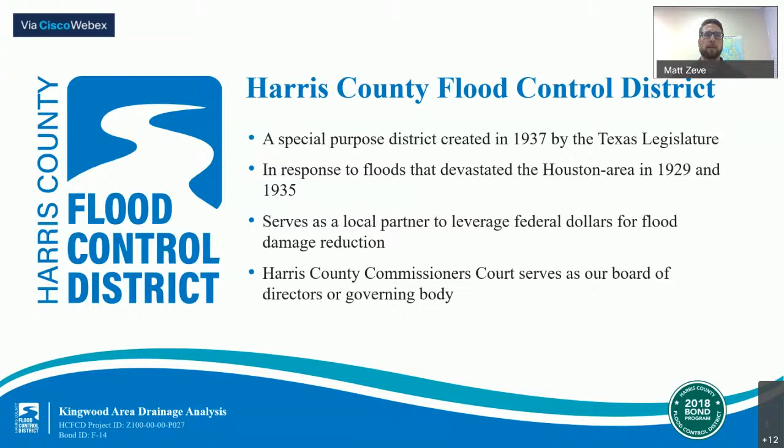The mission of the Harris County Flood Control District is to provide flood damage reduction projects that work with appropriate regard for community and natural values. One of the most difficult challenges we face is constructing effective projects that are sensitive to community and natural values in a highly urbanized area.

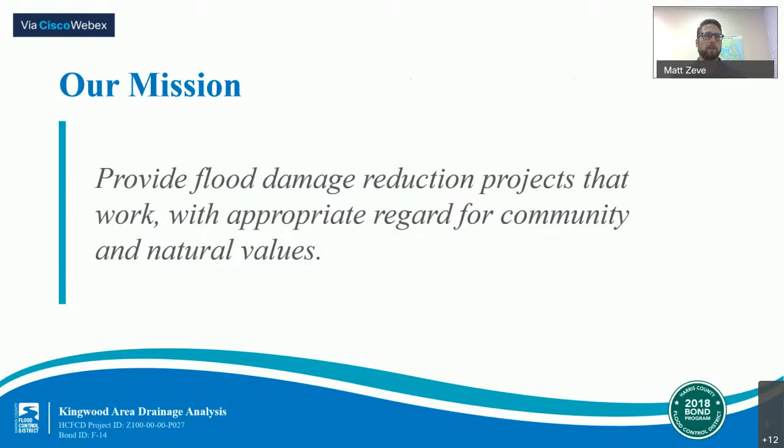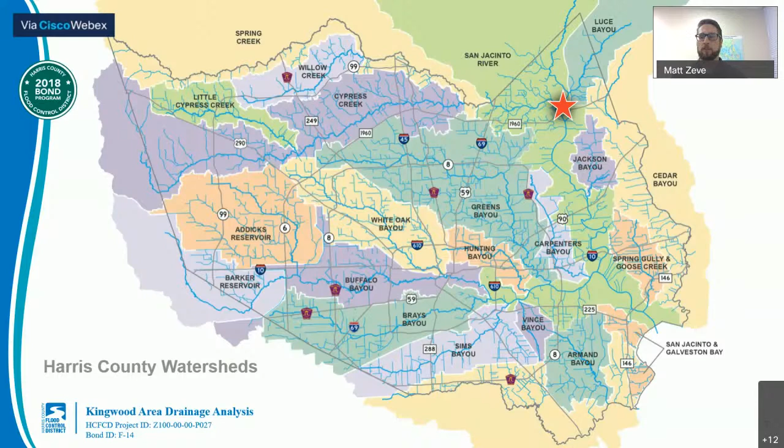Harris County includes 22 main watersheds, totaling approximately 1,800 square miles and more than 2,500 linear miles of channels. 2,500 linear miles is approximately the distance from New York to California. Each watershed has its own unique characteristics and needs. Tonight, we're discussing the Kingwood Area Drainage Analysis within the San Jacinto River watershed. The majority of the San Jacinto River watershed is actually located outside of Harris County.

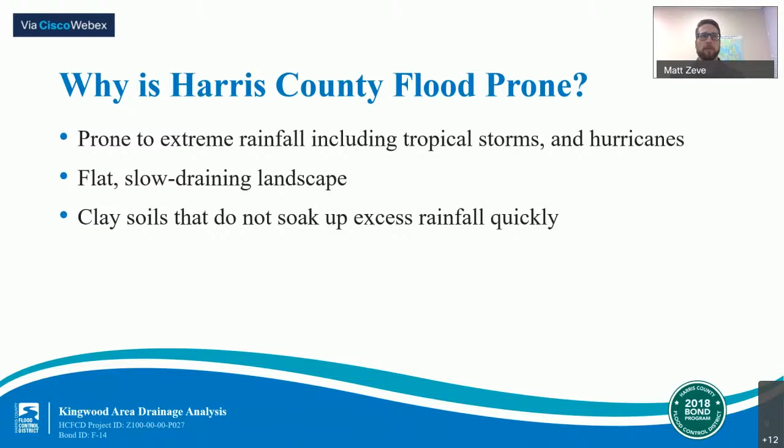Our region has always faced the threat of flooding. Our low-lying, relatively flat land and predominantly clay soils create a naturally flood-prone environment. These flooding issues become more apparent when combined with dense population centers and development that has occurred in our region.

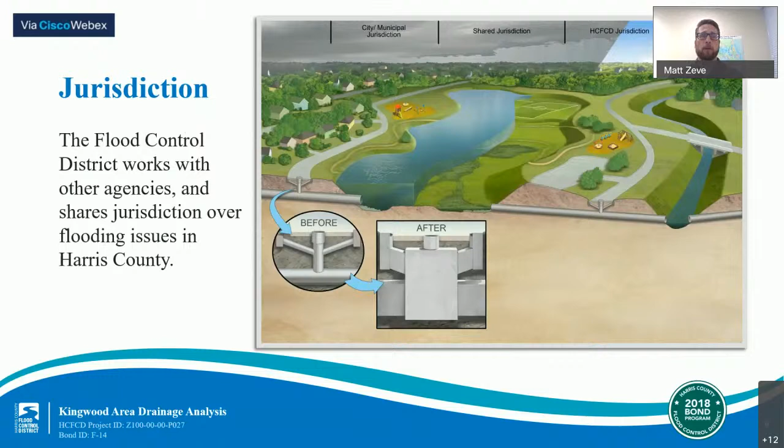Since it is our policy to avoid impacts to properties downstream, stormwater detention basins help to safely take in and temporarily store excess stormwater during heavy rainfall events. Often we partner with the Harris County precincts, utility districts, and others to add recreational amenities such as trails to these basins and along our channels.

Every flood damage reduction project is unique, yet each project begins and ends with common and predictable milestones along the way. Whether a project moves forward and how quickly depends on many factors, including the availability of funding at each milestone, shifting community priorities for flood damage reduction, and other changing circumstances from year to year.

Once a feasibility study report has been approved, and if funding is available, the project or projects move into the project development or preliminary engineering stage. During this stage, the Flood Control District engineers and environmental specialists develop and evaluate possible alternatives, and prepare a project development or preliminary engineering report that includes recommendations that meet flood damage reduction goals. This report will identify needed rights-of-way, determine utility relocations, and develop preliminary cost estimates for recommended projects.

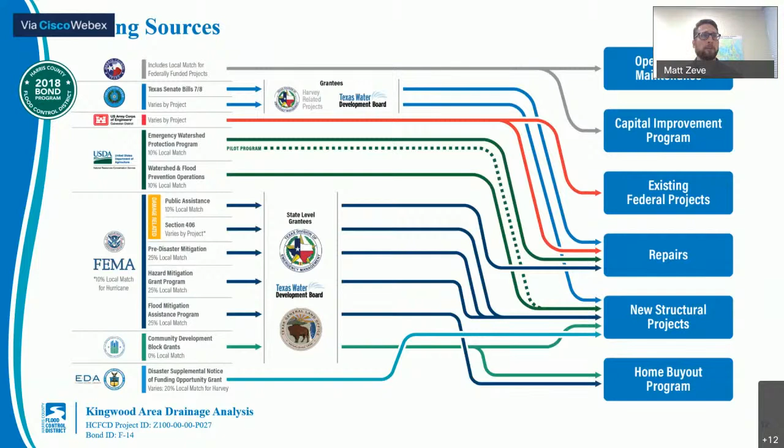Before we proceed with the presentation, we'd like to address some of the frequently asked questions we've received, since we're here tonight to focus just on the Kingwood Area Drainage Analysis. As general information, the Flood Control District does not typically perform dredging, but we have performed conveyance restoration or desilt projects throughout the county as needed.

House Bill 1824, approved by the 86th Texas Legislature, also allows the San Jacinto River Authority, or SJRA, and the Flood Control District to remove material from the San Jacinto River and its tributaries to restore, maintain, or expand storm flow capacity. The SJRA is leading efforts, with support from the Flood Control District, to investigate the feasibility of one or more sand traps along the west and/or east forks of the San Jacinto River to reduce future sedimentation.

The Lake Houston Dam Spillway Project is being led by the City of Houston and is intended to increase the outflow capacity of the Lake Houston Dam. This project proposes additional capacity for the Lake Houston Spillway that would allow for a rapid decrease of water levels in Lake Houston in advance of storm events.

We've also received many concerns from the community related to repetitive flooding near the confluence of Taylor Gully and White Oak Creek. The Kingwood Study analyzed Taylor Gully from the study limits at Bassingham to the natural section of the channel at the confluence of White Oak Creek. The majority of White Oak Creek is outside of Harris County, and analysis indicates that issues with White Oak Creek are caused by water backing up from the east fork of the San Jacinto River. This would need to be analyzed further as a regional issue.

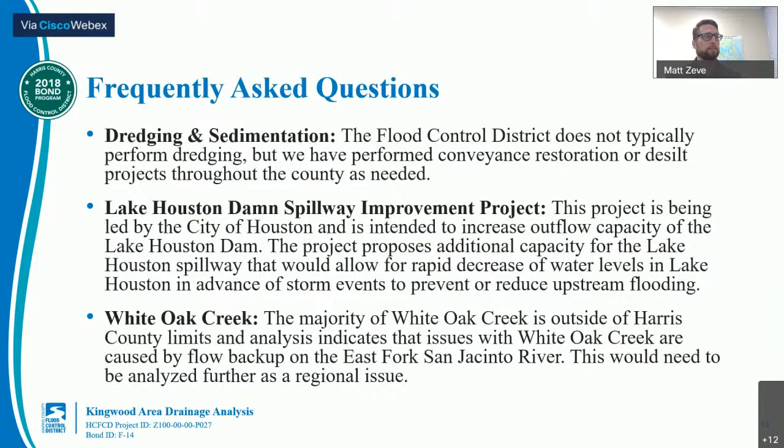Understanding jurisdiction over the different parts of the drainage network in Kingwood is important. The Kingwood Area Drainage Network includes all the paths that stormwater takes from raindrops first hitting the ground to stormwater flowing out of the Kingwood area and into channels that move water to Lake Houston. The first part of the drainage network could include roof gutters, French drains, or the grading or slope of your yard. Typically, property grading is designed to move stormwater from your yard to a storm sewer or roadside ditch. When the stormwater is on your property, that stormwater is typically the property owner's responsibility.

Most residences in the Kingwood area rely on street drainage systems. This includes roadways that have been designed to convey stormwater to roadway inlets that allow stormwater to drain from the road into storm sewer. Some areas in Kingwood have roadside ditches that drain water out of neighborhoods. Neighborhood drainage, including roads, storm sewers, and roadside ditches, are typically under the jurisdiction of the City of Houston, not the Flood Control District.

Before the Kingwood area had homes or structures, when large rainfall events occurred, stormwater would simply flow over land to receiving bayous without any obstructions. But now with homes and structures in the Kingwood area, the area's natural drainage pathways were altered. Today's development criteria mandates that extreme rainfall be moved out of a neighborhood through adequate local drainage or stored safely in a stormwater detention basin. However, these criteria were not adopted until around the year 2000.

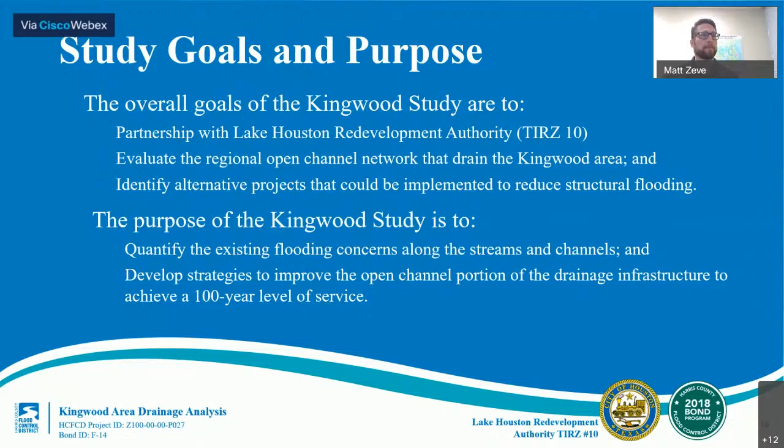The portion of Kingwood south of the West Fork of the San Jacinto River is not included as a part of this study area, but will be included in the Flood Control District's drainage analysis of the Atascocita area, which is a separate bond project. In this presentation, when I refer to flooding, I'm exclusively referring to structural flooding, or when stormwater enters homes and businesses. I'm not referring to street flooding.

The roads in the Kingwood area are part of the Kingwood Drainage Network, and many of these roads were purposely designed to move stormwater. The concept of building low roads and elevating homes is a common development strategy throughout Harris County. Today, development criteria for roads only allows for ponding of approximately 1 foot of water. A modern design will require the developer to design a path where excess rainfall runoff can drain out of a neighborhood without flooding structures. In Kingwood, there are generally no planned extreme event pathways.

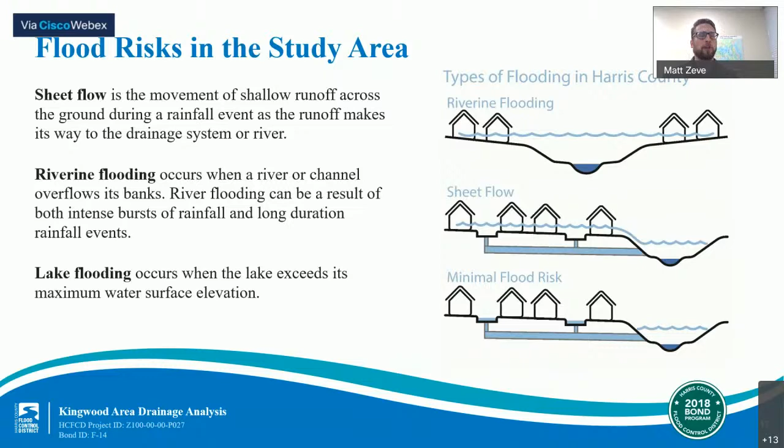So when rainwater exceeds the capacity of the storm sewer system in the streets, which is generally between 1 to 2 inches per hour, street ponding will begin like it did during Tropical Storm Imelda. If extreme event pathways were to be designed, they would need a channel or bayou with the appropriate capacity to be able to handle the additional flows. So the first step in the process to reduce flooding in the Kingwood area must begin with improving the bayou and channel network, which is the focus of the Kingwood study.

Again, this study represents the first critical step in the process to improve the drainage network in the Kingwood area. The methodology followed for the Kingwood study reflects current thinking and modern tools for hydrologic and hydraulic analysis, and incorporates the latest information with regard to expected rainfall by using NOAA's Atlas 14 rainfall frequency estimates. However, further investigation for some aspects of the Kingwood study is recommended to further refine the results.

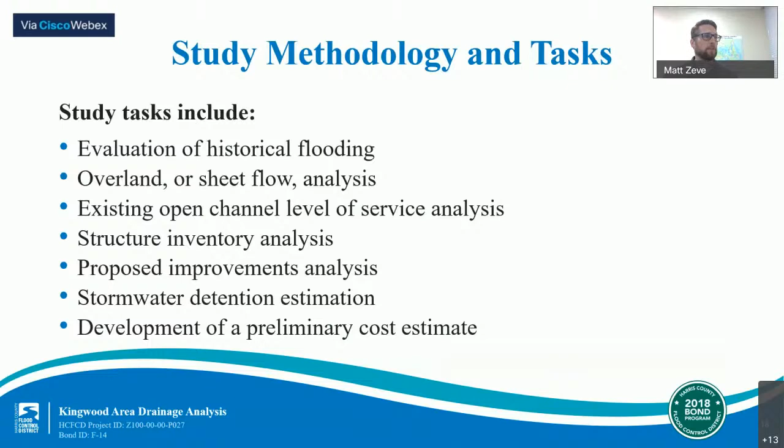During the study, we looked at historical flooding, analyzed how water moves across the ground, looked at the channel's current carrying capacity, looked at the structure inventory, estimated required detention volumes, determined project benefits, and developed preliminary cost estimates. A 2-dimensional hydraulic model was developed for the Kingwood and surrounding areas, which allows the study of both the overland flow of stormwater and the performance of local storm sewer systems. The study identified potential areas that are at risk of bayou and channel flooding and areas at risk of overland flow and storm sewer capacity limitations.

The City of Houston has inspected the Kingwood storm sewer network and found the storm sewer systems are functioning to the design specifications which were in compliance with codes at the time they were built. The storm sewer systems within the west side of Kingwood are older and not in compliance with current storm sewer criteria, so certain areas of Kingwood are more at risk of flooding due to water not making its way out of the neighborhood quickly enough through the storm drains.

The hydraulic engineering models were used to determine how much water each channel can safely convey before coming out of its banks. Additionally, the hydraulic engineering models were used to determine whether bridges were overtopped during storm events, which would potentially require changes to those bridge structures. In contrast to many other areas in Harris County, the level of service analysis identified several channels within the study area with a 100-year level of service, which is our current design criteria.

For existing channels with a 100-year level of service that were located in older portions of Kingwood, a secondary analysis was completed where we reanalyzed the channel capacity, assuming future improvements to the neighborhood storm sewers and roadside ditches. No improvements were proposed as a part of the study if the streams were determined to maintain a 100-year level of service with no flooding of structures.

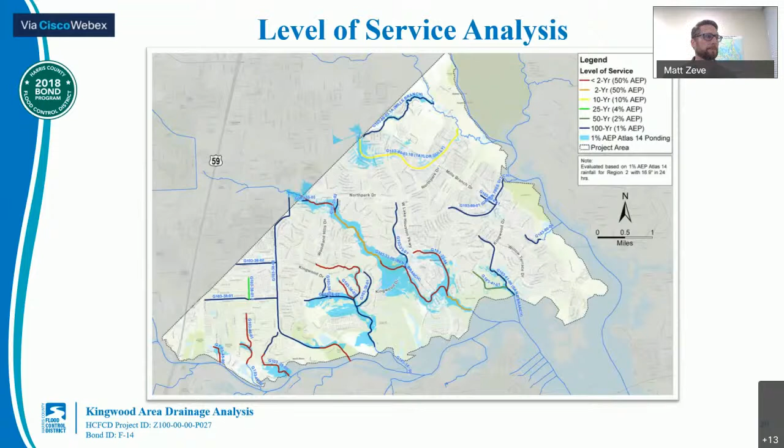A structure inventory analysis was performed as part of the study. A structure inventory is a tool the Flood Control District uses to estimate the elevation of all Kingwood area homes and allows for us to determine their flood risk. A structural benefit analysis was also performed as a result of any expected lowering of water surface elevations from recommended improvements. As channel improvement options were developed with an assumption of additional improvements to local neighborhood drainage systems, additional benefited structures were also identified.

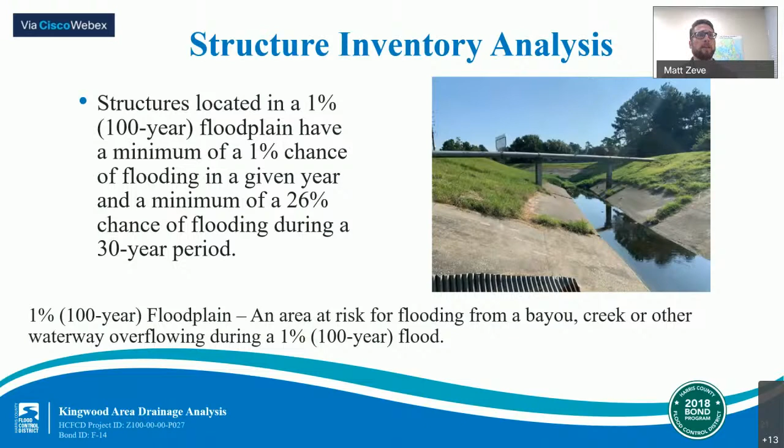Recommended improvements to the open channel network were developed to provide structural flood protection from the 100-year Atlas 14 storm event within the study area. The analysis was performed assuming improvements to the open channel network within the study area and a portion of Northpark Drive within Montgomery County.

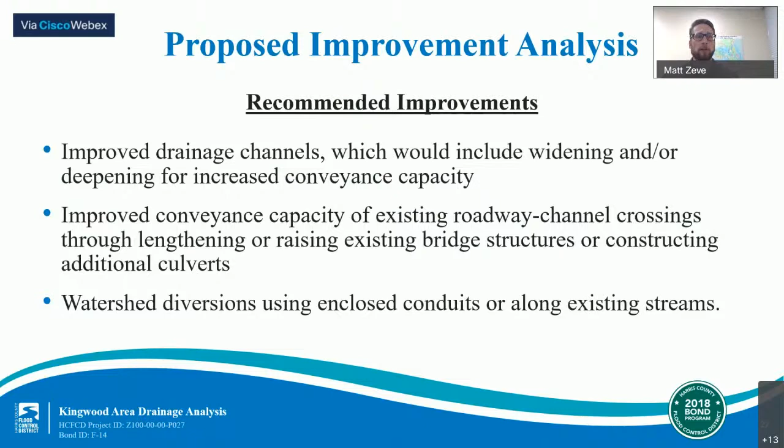For the streams found to be deficient in level of service, improvements were recommended, including improving drainage channels by widening and/or deepening for increased conveyance capacity, improved conveyance capacity of existing roadway channel crossings through lengthening or raising existing bridge structures or constructing additional culverts, and watershed diversions using enclosed conduits or along existing streams.

Due to the scale of improvements analyzed throughout the study area, detention would be most efficiently provided regionally in large stormwater detention basins. To determine additional detention requirements due to increased runoff to Lake Houston or the San Jacinto River associated with proposed channel conveyance improvements and assumed local drainage improvements, a discharge mitigation analysis was performed.

It is important to note that this study does not include identification of stormwater detention basin locations, only estimates of the detention volume required to achieve no adverse impact downstream.

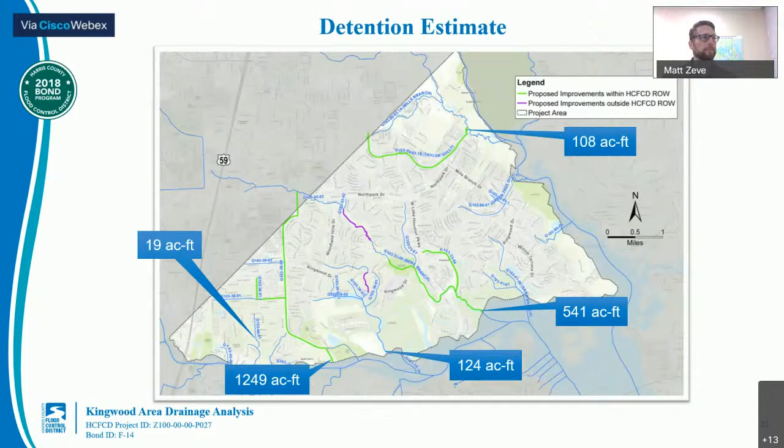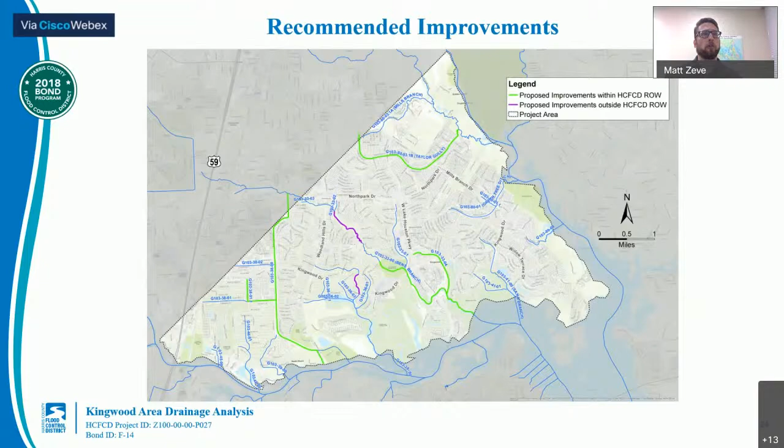To reach the goal of providing a 100-year level of service protection to structures within the study area, 6 streams with rights-of-way controlled by the Flood Control District are proposed for improvements, and 3 streams with rights-of-way controlled by other entities are recommended for improvements.

While the analysis of the Kingwood Diversion Ditch determined that the channel has a 100-year level of service upstream of Woodland Hills Drive, the existing right-of-way allows for channel improvements to divert additional flow from Ben's Branch. The proposed improvements include channel modifications, flow diversion from Ben's Branch, and bridge replacements.

These proposed improvements would need to occur prior to any further proposed stream improvements in the study area. The proposed Kingwood Diversion Ditch improvements would require purchase of additional land as well.

The reduction in water surface elevations along the Kingwood Diversion Ditch and Ben's Branch result in the removal of the 100-year stream inundation from 62 structures and allows for local drainage improvements that could benefit an additional 586 historically flooded structures. The proposed improvements also provide increased flood protection for Kingwood High School and St. Martha Catholic School. This project is one of the 2 projects identified to move forward to preliminary engineering.

In evaluating the improvements to Ben's Branch, we attempted to minimize the impact to the natural section located between Woodland Hills Drive and Rocky Woods Drive. However, we determined that channel enlargement was required to provide a 100-year level of service for the areas upstream.

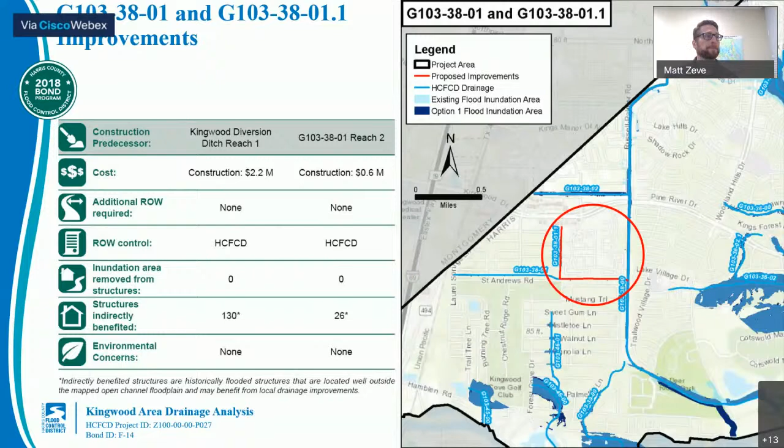The upper portion of Taylor Gully was determined to have a 10-year level of service with a large number of structures subject to flooding upstream of Rustling Elms Drive.

To provide a 100-year level of service for Taylor Gully, 2 miles of conveyance improvements are recommended from the upper limits of the channel to an existing channel drop structure located near Maple Branch Drive. Taylor Gully channel improvements include a concrete low-flow structure.

This approach allows for improving the level of service without large land purchases. The reduction in water surface elevations from the proposed improvements results in the removal of the 100-year stream inundation area from 387 structures and allows for future local drainage improvements that could benefit an additional 62 structures. This project is one of the 2 projects identified to move forward to preliminary engineering.

Analysis of Ben's Branch determined a 100-year level of service downstream of Kingwood Drive and a less than 2-year level of service upstream of Kingwood Drive, due to the area being naturally low-lying near Royal Circle Drive. To provide a 100-year level of service while accounting for local drainage improvements, channel enlargement and roadway crossing improvements were analyzed from Kingwood Drive upstream to Twin Grove Drive.

Proposed channel improvements from Woodland Hills Drive to Kingwood Drive are located within the existing right-of-way. The reduction in water surface elevations associated with the proposed improvements results in the removal of the 100-year stream inundation area from 6 structures. Improvements to the local drainage system could benefit 60 additional structures.

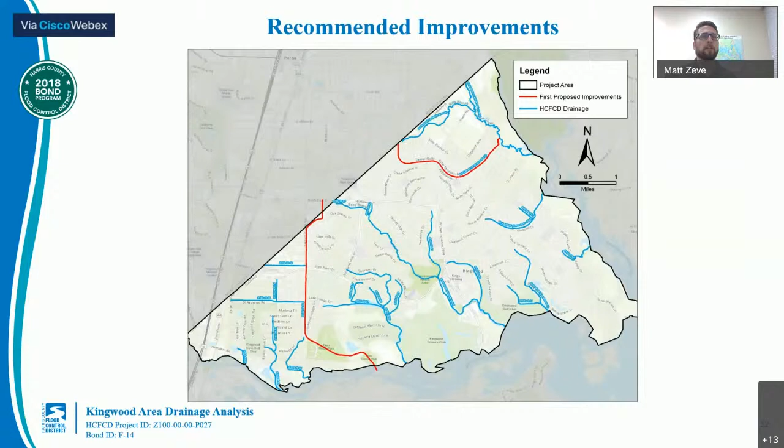These improvements were determined to provide the greatest benefits. To move forward, a detention mitigation plan will need to be developed and implemented for Ben's Branch, the Kingwood Diversion Ditch, and Taylor Gully. The detention mitigation plan will also need to account for the recommended improvements to the tributaries of Ben's Branch and the Kingwood Diversion Ditch.

We recommend that the improvement options be constructed and implemented in a phased approach from downstream to upstream. This approach will help ensure the receiving systems have the necessary capacity and do not result in downstream impacts during construction. Additionally, the improvement options for the tributaries to Ben's Branch and the Kingwood Diversion Ditch cannot be constructed until the improvements to the main stem of Ben's Branch and the Kingwood Diversion Ditch have been constructed.

Similarly, local drainage improvements cannot be constructed until after the detention mitigation plan and recommended improvements have been implemented for the receiving channels.

It is important to remember there's no single solution to reduce flooding in the Kingwood area. Each of the recommended improvements will take many years to implement, and some will require further coordination with other entities, including the City of Houston.

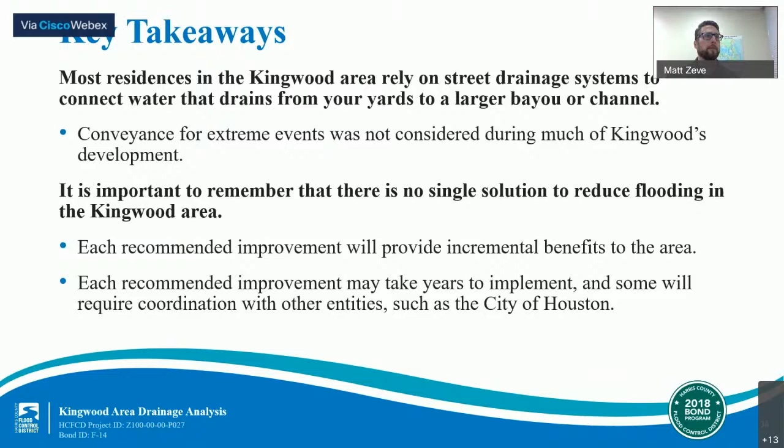We would like to acknowledge the various concerns that the Flood Control District has received from your community. We understand that there are concerns that we may not be able to address. However, the Flood Control District is committed to working with you to identify issues and work towards potential solutions. Your feedback and continued engagement are vital to implementing successful projects that will reduce flooding risks.

The Flood Control District has led and implemented maintenance activities in the Kingwood area to address flooding issues and concerns since Hurricane Harvey, including researching deeds to determine the ownership and maintenance responsibilities for all 29 miles of open channels in the Kingwood area. In the case of some channels, no public entity claims ownership.

Developing a long-term plan for the ownership and maintenance responsibilities of all these channels. Identifying potential drainage issues that would require additional coordination or investigation before becoming a long-term project. Determining the environmental permitting requirements for working within the tributary channels and the San Jacinto River.

Determining immediate projects. These types of projects could include selective clearing of debris and sediment removal within the channels located at Ben's Branch at Woodland Hills, Ben's Branch downstream of Woodland Hills in the natural section, Kingwood Diversion Ditch, and Taylor Gully at Woodstream Village.

I would like to thank each of you for being part of tonight's presentation. As we move forward from the completion of the study and into the preliminary engineering phase for the identified projects, we hope that you'll continue to stay actively engaged.

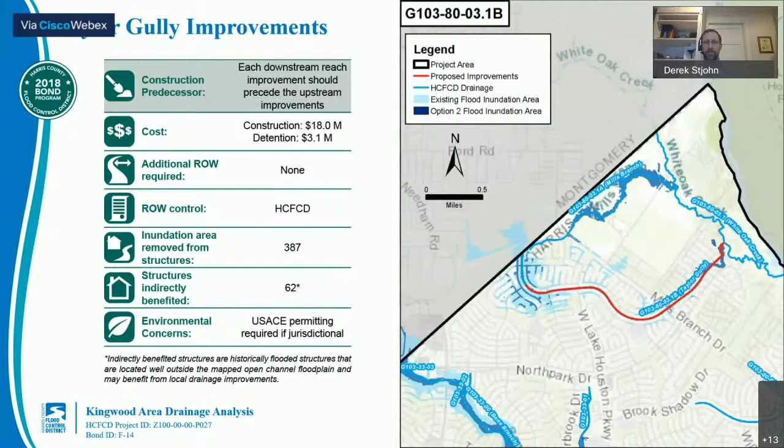All right, thank you. Next question is from Walter R. Walter R. is concerned about the amount of sediment that comes into Kingwood Lakes. When the lake was first built it was deeper, but now birds can stand in the middle. What can be done with Kingwood Lakes?

The Kingwood Lakes area, the lake itself, is actually owned by I believe a homeowner association or a property owner association. Since that HOA or POA owns that lake in fee, it's their land, it's their infrastructure, and it's ultimately their responsibility to maintain it. I believe several years ago they paid to have material removed from that lake and deepen it, but I don't know the current status of it now. So what can be done is work with the local HOA or POA and maybe repeat that dredging project from the past. Thank you, Matt.

Next question. David S. asked whether Commissioner's Court is abiding by the bond election by dedicating and allocating the bond funds for flood mitigation projects exclusively.

Sure, I'll take that one too. The Commissioner's Court is 100% abiding by the bond election. All of the money that the Harris County Flood Control District is using to implement over 140 bond projects right now is coming from the bond program, and $0 of that is being used for anything else in Harris County. So I can confirm that 100% of the bond funds approved by the voters in August 2018 are going towards flood damage reduction projects.

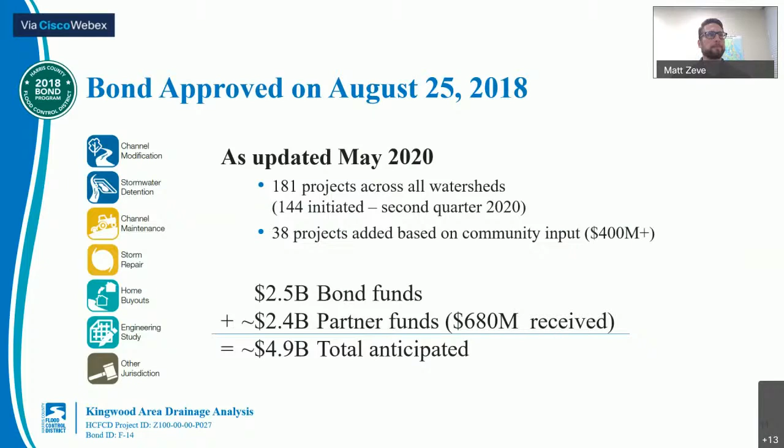Thank you, Matt. Alan Shepard is asking, how does the city's Northpark Drive project work with this? I'd like Stan Sarman to address that question.

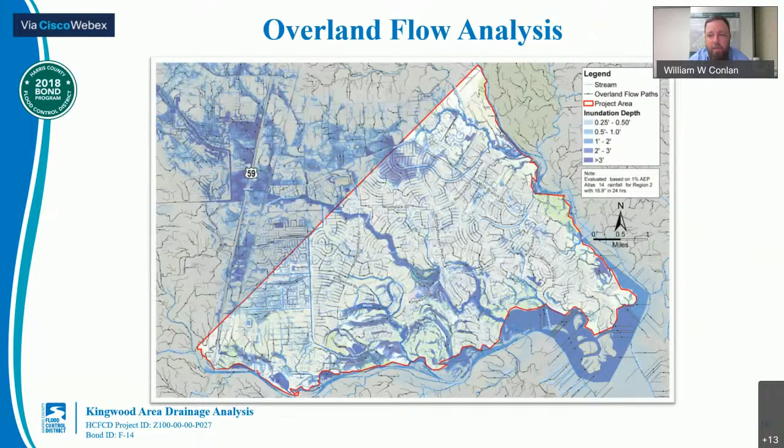Thanks, Will. Next question. Who will pay for and conduct maintenance of these projects once they are constructed? The Flood Control District and hopefully some funding partners will pay for the projects. We work to apply for and hopefully receive grants from the state and federal government, and also work to enter into partnership projects with local entities such as municipalities in Harris County and municipal utility districts. Once these projects are built, the Flood Control District will maintain them in perpetuity.

Thank you, Matt. Luann is asking about the timeline of this project. Why are we still in the first stage of feasibility 2 years post-bond election? Luann, that's a good question, we get asked that a lot. Believe it or not, this project moved very quickly compared to other feasibility studies of this size and complexity. The bond election passed in August 2018. The flood control district didn't receive funding until November 2018, and we were able to start projects in December 2018, January 2019. There was quite a bit of work that took place, and this feasibility study was done on schedule.

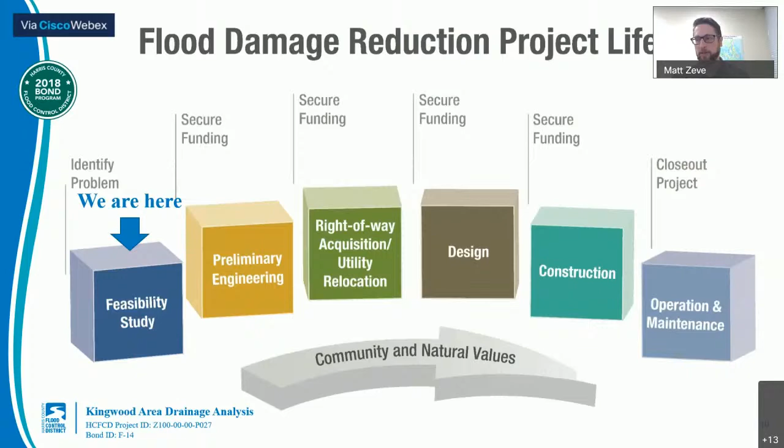Thank you, Matt. Next question is from Bob Rehack. He's asking if improvements to the diversion ditch mean that you don't need to widen the natural section of Ben's Branch. I'll ask William to handle that, and he might need to get Connor or Derek to go into detail.

Sure. So the diversion ditch does have its main purpose of diverting as much flow from the Montgomery County side as possible and alleviating the flows that go into Ben's Branch. We do have improvements to Ben's Branch. We do have plans to widen Ben's Branch. As you can see on this slide, there's about $12 million in additional right-of-way.

Now, the majority of that is downstream. We do plan to leave that center section that is the nature preserve. As you can see on the exhibit, it has a pretty wide flood swath through there, and we're going to maintain that. But the areas upstream and downstream will both be improved.

Connor, do you want to add anything to that topic real quick? No, I can just chime in that the diversion, like you said, does take the majority of the flow, but in order to provide that 100-year level of service, we found that improvements were required within the natural section to help all the structures upstream of that area.

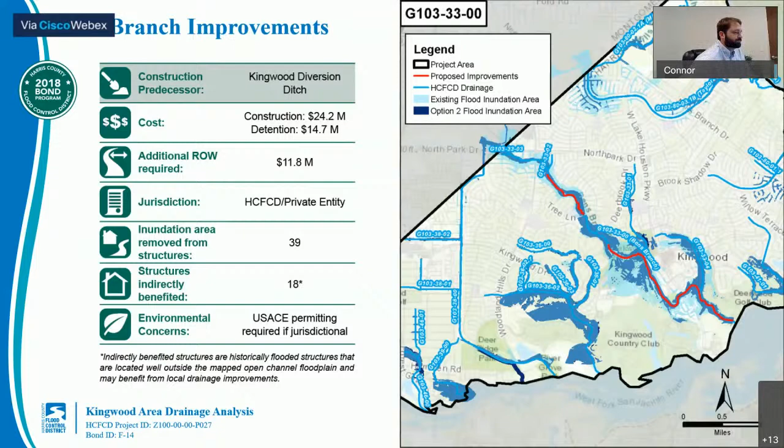All right, thank you, Will and Connor.

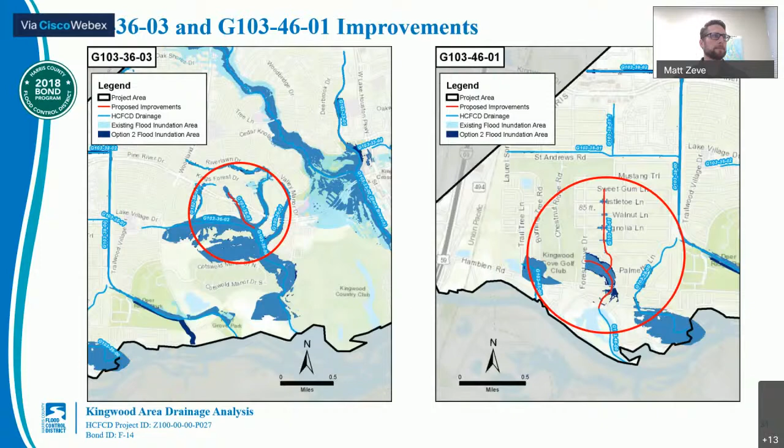That channel section did have a relatively good level of service south of Kingwood Drive. The upstream had some historical flooding and ponding through the commercial parking lot areas, the HEB, the old Randall site. We do have some plans to improve the channel upstream, and we do have plans to improve the culverts on Kingwood Drive, and a little bit of work in the downstream section. It does have a construction predecessor that really has no value until the southern end of Ben's Branch is improved as it goes into the West Fork.

And again, as we talked about some of the sequencing, Ben's Branch improvements' predecessor is effectively the Kingwood diversion ditch and getting most of the water off of there. So there's a little bit of a timeline to get to that point. But there is—when we looked at the model, the lower section of Ben's Branch, I believe it did not have a 100-year level of service. It was a relatively low level of service, and it does have some improvements through there as well. So there is that sequencing that needs to be taken into consideration.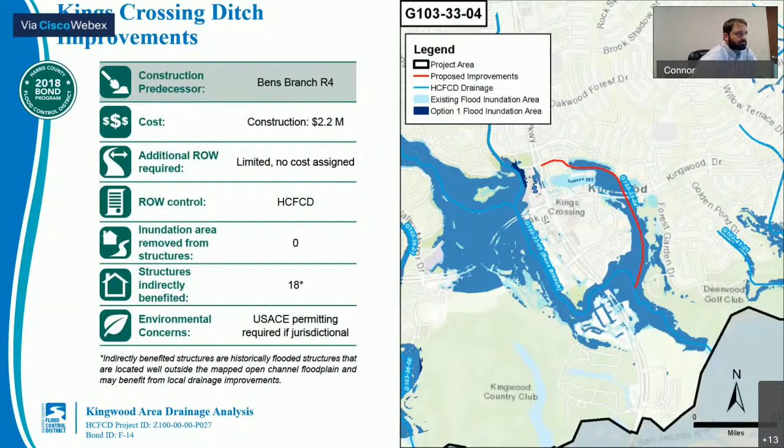All right, thank you both. John E. is asking if the diversion ditch will be optimized to relieve Ben's Branch.

Yeah, I'll take that one. I mean, in effect, the diversion ditch was set up years ago with a significantly wide right-of-way, I believe 300 plus feet. And it was only constructed about half capacity, knowing that it could be expanded in the future as development came in the north so that more water could be diverted off of Ben's Branch. It effectively has reached that time, and we are looking to optimize the complete right-of-way.

When we looked at the downstream portion, if you kind of see there was that darker blue section right along Woodland Hills Drive. As we started making the improvements and the alternatives, we identified that crossing Woodland Hills Drive with all of that increased flow, as well as trying to get a new corridor through the park, Deer Grove Park, we looked at a secondary outfall, a new outfall before it gets to Woodland Hills Drive, and that was going to be our big benefit to get the water out.

So we are looking to optimize it. We are looking to utilize the complete right-of-way. The $3.6 million in additional right-of-way is mostly for the outfall, but there's also a few slivers here and there to kind of get to the full width. And then the project will be deepened a little bit as well as widened significantly.

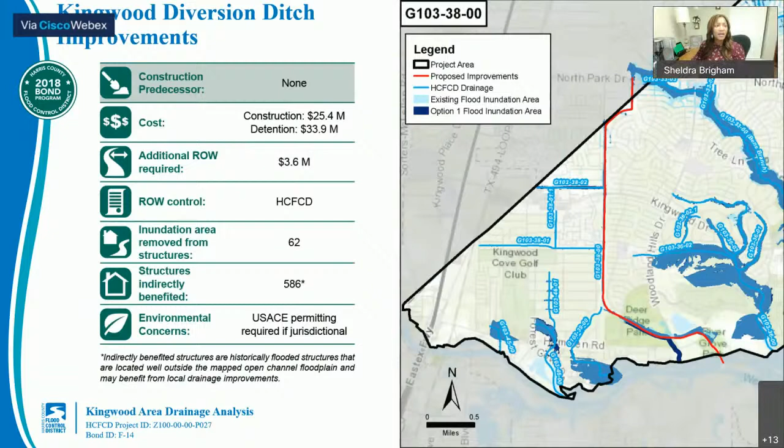Thank you, Matt. Daryl P. is asking if construction plans for the North Park Drive project can be made available for public comment. Stan, do you want to take that one? Could you repeat the question? Whoops, wait a minute, I'm muted. No, we hear you. Someone's asking if they can review the construction drawings for North Park Drive improvements.

Well, I'll be glad to show them to them. We're not distributing them to the public yet, since they have not been approved by the city and TxDOT and UPRR. As a matter of fact, we have some meetings coming up with UPRR here in a couple of weeks to go through the plans and get their comments. But we don't have a problem showing them. We're not just distributing them to anybody right now yet. Okay. We'll put them in touch with you, Stan. Yeah, please. I have no problem. All right.

Thanks, Stan. Next question. Paul is liking the virtual meeting format. Thanks, Paul. He's asking what a well-maintained ditch looks like. Should the ditch be mowed regularly? Is it okay to have trees growing in the ditch?

So a well-maintained grass-lined channel: the flood control district mows our grass-lined channels 3 times per year, which we found to be an effective number of mowing cycles to keep the tall woody vegetation down and from growing up into the channel. And from time to time, we actually do plant trees in the channel, on the channel banks, and there's different reasons for that. But the vast majority of our channels do not have trees on the banks. And from time to time, we have to go into some of our channels and remove large vegetation like trees to make sure that they function to their full capacity.

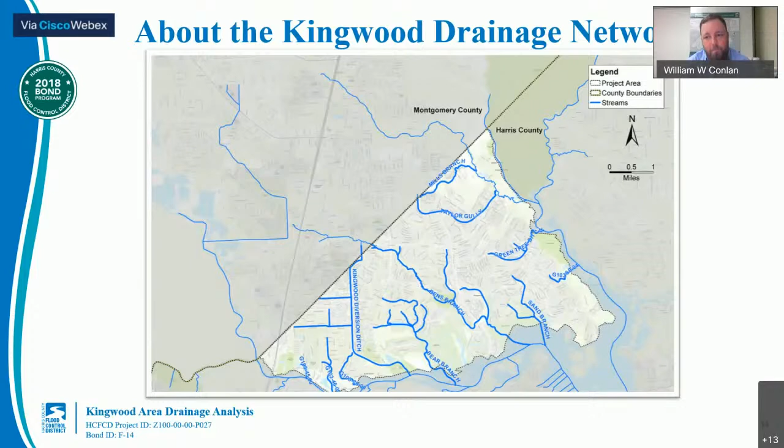Thank you, William. Mr. Davis understands the sequencing discussed, but is there any other low-hanging fruit that can be addressed now to help? That's a good question. We have been completing several large maintenance projects in and around the Kingwood area. We consider that low-hanging fruit to fix the problems with the infrastructure that exists currently. And then going forward, we hope that we can complete a successful deal with the City of Houston on the Woodridge Village area to acquire that property and construct additional detention in the Taylor Gully watershed. But other than that, we haven't really identified any quote unquote low-hanging fruit.

Thanks, Matt. Mr. James is talking about the Ivy Point neighborhood basin. He said the basin is deeper than the typical height of water in the Kingwood diversion during a rain event. Does this mean that water may enter the neighborhood basin from the diversion ditch and flood the neighborhood? William, do you know the answer to that one? I am not familiar with that specific basin. Whereabouts is Ivy Point? South of Kingwood Drive near the diversion ditch? How about we follow up with them after the meeting tonight? Yeah, definitely. We will definitely research that and have a formal answer for that one.